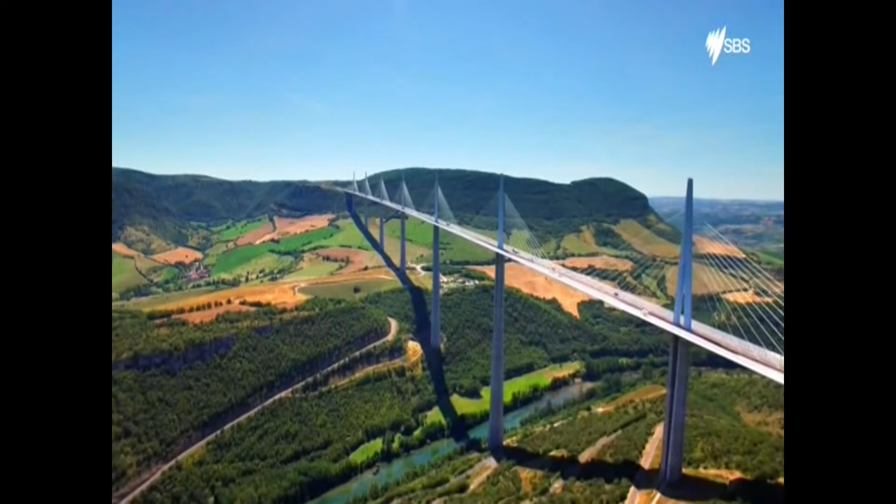Majestic, dramatic, awe-inspiring. These are the bridges that are worldwide icons, as well as engineering marvels. Each of them broke new ground. The first, the biggest, the longest, and the tallest.

I'm Rob Bell, an engineer, and I'm on a global adventure to discover how and why these magnificent structures were built, and to learn about the sweat and the sacrifice that went into their construction.

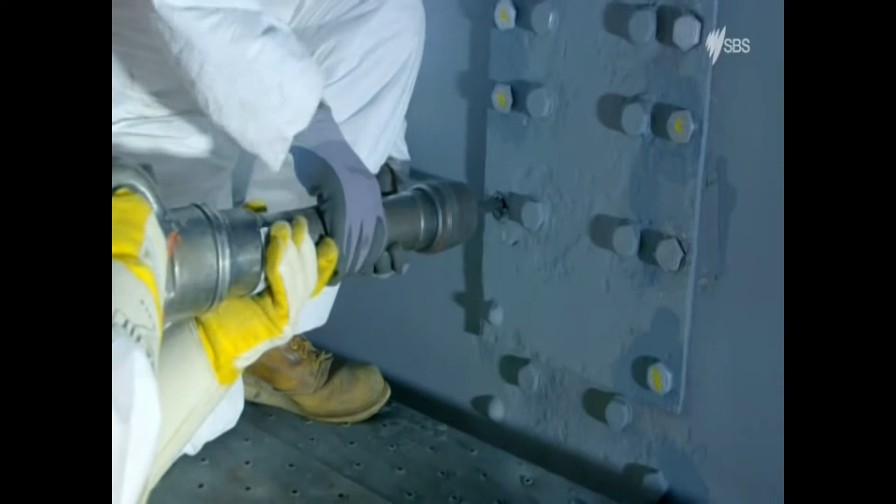I'm going to take you closer than ever before. Oh, this is magnificent. Inspect them from every conceivable angle. Oh, yeah. And meet the men and women who keep them working round the clock, no matter what. Check this out. These are the world's greatest bridges.

Sydney, Australia's oldest and largest city, and one of the world's most beautiful waterfronts. It's known as the Harbour City, and the very best way to arrive here has to be by boat, just as the first European settlers did some 230 years ago.

Sail into the harbour and you'll pass two world-renowned structures, the Sydney Opera House and the Sydney Harbour Bridge.

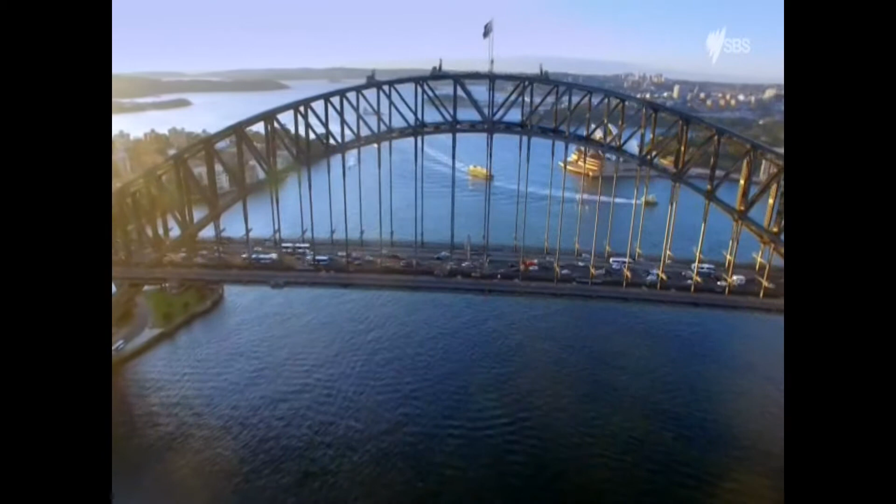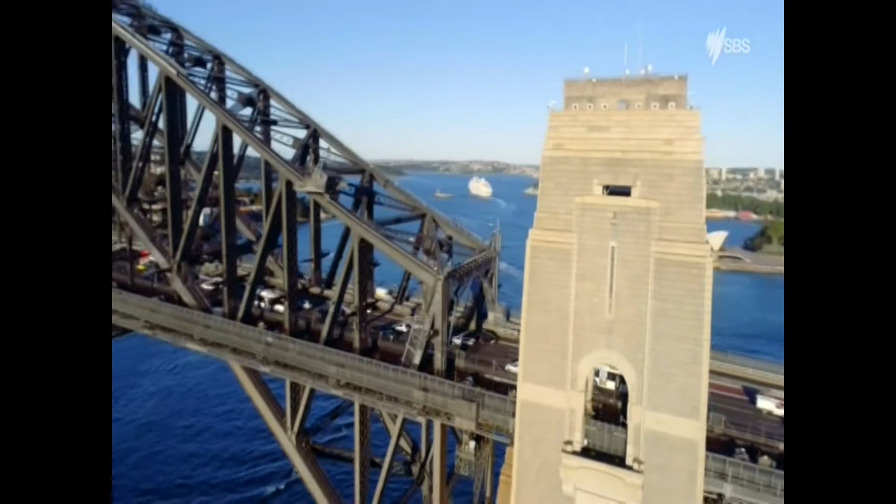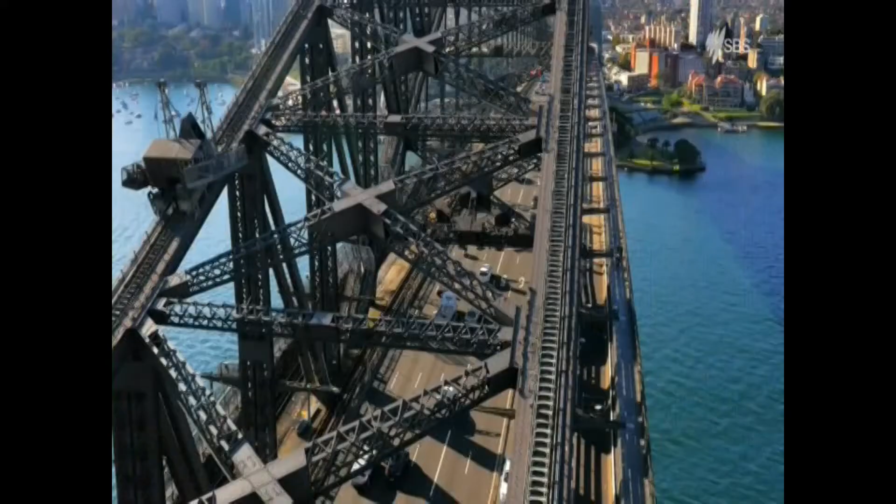Rising to a height of 440 feet, it's the world's tallest steel arch bridge, connecting the northern suburbs of Sydney with the city centre. It weighs more than 39,000 tonnes, spans 1,650 feet and is 160 feet wide. It carries 8 lanes of traffic, 2 railway lines, a footpath and a dedicated cycle path. Every day, more than 200,000 cars travel across it.

When it opened on the 19th of March 1932, it instantly became a world-renowned landmark. And since then, millions have passed across it, over it, and under it. Like a giant, triumphant gateway, it signals your arrival here into Australia.

The bridge had taken a century from first proposal to completion. The construction itself lasted 8 years and cost £6 million. And its arrival marked a new stage in this young city's remarkable evolution.

Sydney was founded in 1788 when 11 British ships landed, right about here. On board were more than 1,000 settlers, including some 850 convicts. The captain described this as, without exception, the finest harbour in the world. And he named it Port Jackson.

Within 4 years of the first shipload, another 4,000 convicts arrived. They were followed by the first free settlers from Britain, who travelled here to make a new life. By 1871, 200,000 people called it home.

As the south side of the harbour became crowded, some began settling directly opposite. The North Shore's so close, look, you could swim to it. Yet to get there by land, you'd have to travel a good 15 miles all the way round. And in the 19th century, that journey would have taken about a day.

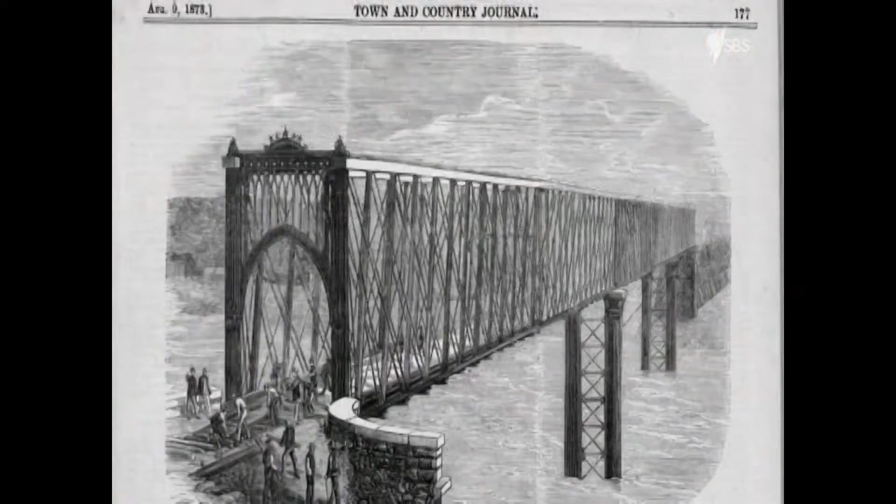The solution, everyone knew, was a bridge between the south and the North Shores. In fact, this wasn't a new idea. Throughout the 19th century, various bridge proposals had been submitted, but had all been rejected by successive governments. The designs were considered too fantastical, too unsightly, too much of a risk to shipping, or simply too expensive. But by 1900, a solution was needed urgently.

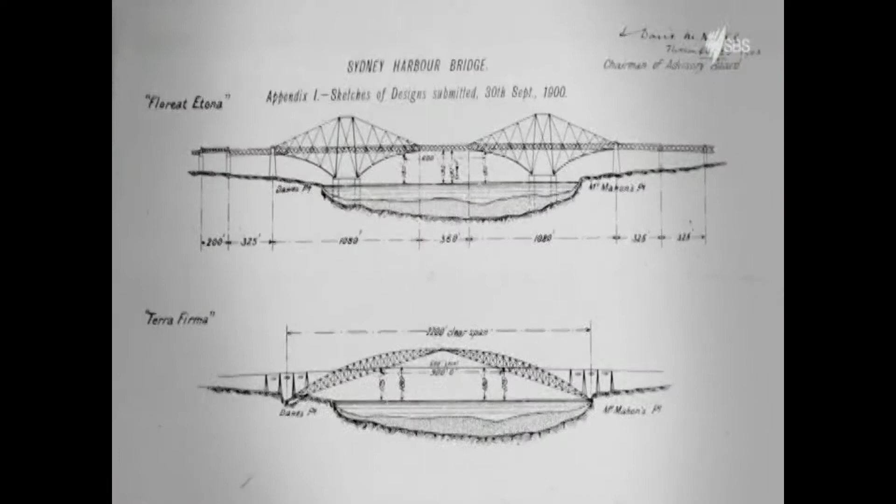So the government launched a worldwide competition to find the best design and construction plan. 30 of the top entries were put on public display here at the Queen Victoria building, once a market, but now a smart and chic mall. But the judges deemed them all to be unsatisfactory and too lacking in detail.

The only answer? A second competition, this time with a much more detailed brief. The bridge had to allow a clearance of 170 feet above the water. The main span needed to be 1,192 feet long, and the deck a minimum of 60 feet wide. It also needed to accommodate 2 railways, 2 roadways, 2 tram tracks, and 2 footpaths.

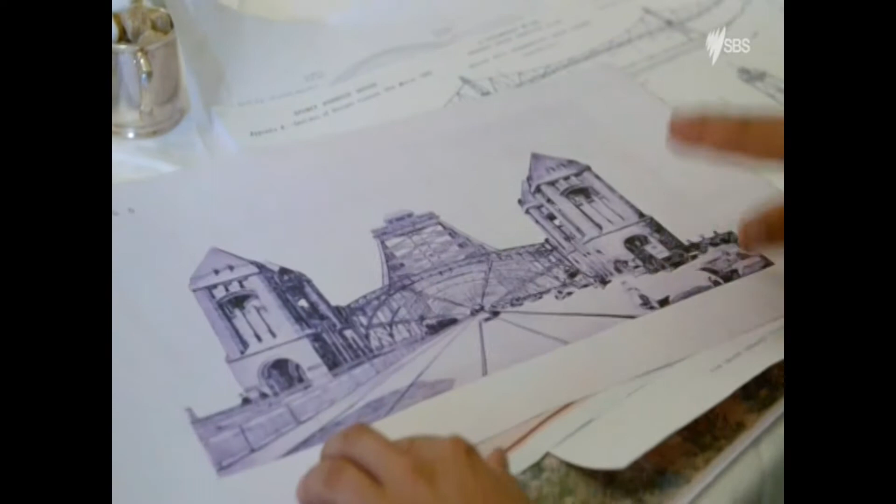It was this submission from Norman Selfe that won in the end. A cantilever bridge, a design where the beams are anchored at just one end and supported by large towers. The judges advised the government that construction should start immediately and be completed within 5.5 years.

But then a change of government brought the entire project to a grinding halt before it even got started. The designers were furious. Over a period of 3 years, they'd invested a huge amount of time and money into what they described as the Sydney Bridge guessing competition, and all for nothing. And much to the anger of the people, it was looking like Sydney Harbour would never get its bridge.

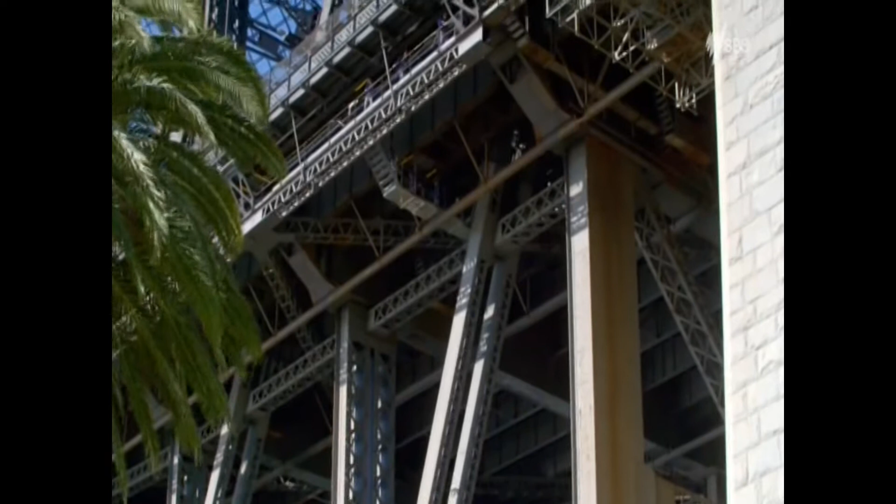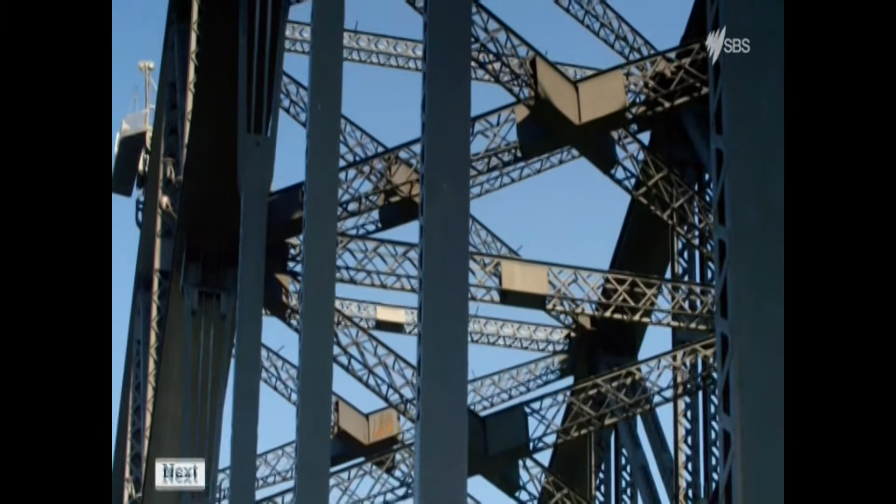The Sydney Harbour Bridge, once the highest man-made structure in Australia and still the most famous. Walking across, you get a real appreciation of the scale of what's here. But it's not just the size, it's solidly built too, and you get a real sense of that looking up - the width of the steel plates that make up the arches, all the truss work between them, not to mention the imposing granite-faced pylons at each end.

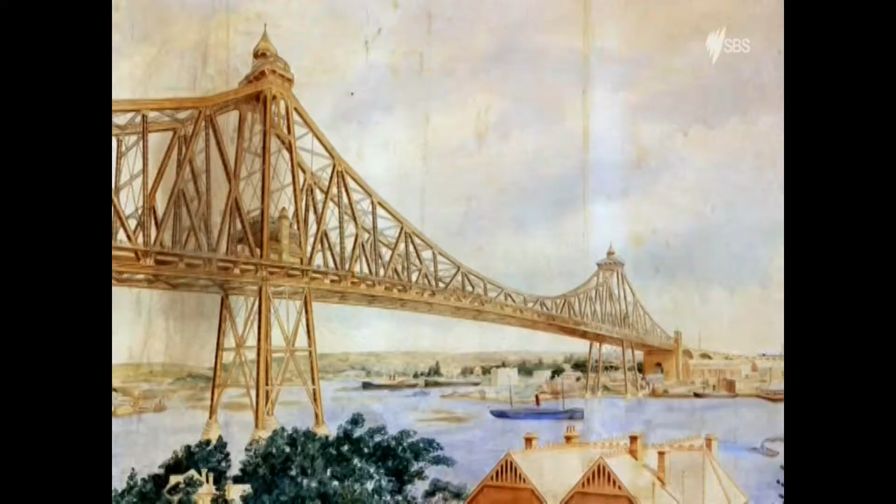It's seriously impressive. But at the beginning of the 20th century, it seemed unlikely this magnificent bridge was ever going to be built, as the project was hit by one delay after another. Norman Selfe's design, now more than 10 years old, was outdated, and following his death in 1911, the doors were left wide open for a new generation of bridge designers.

The bridge we see and admire today might not have existed if it weren't for the drive and determination of one man, John Jacob Crew Bradfield. And even if it had gone ahead without his involvement, it would certainly have looked very different.

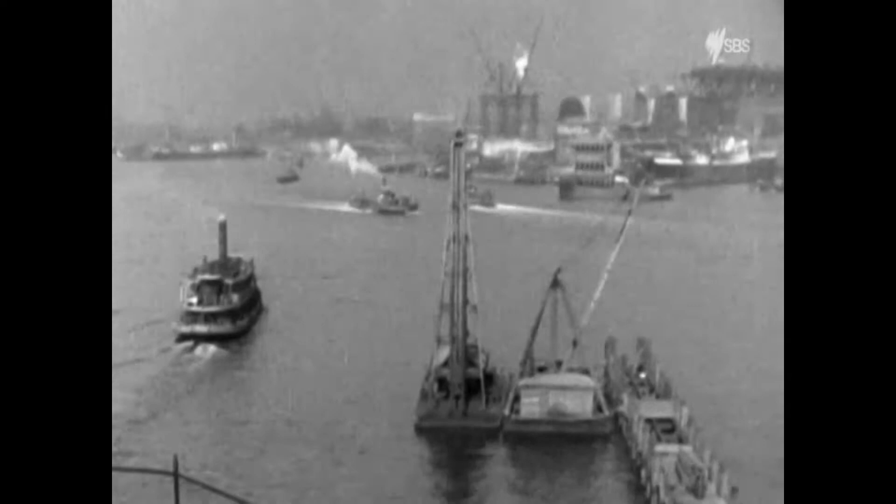Bradfield began his career as a draftsman. In 1891, he joined the New South Wales Public Works Department and went to live on Sydney's North Shore. That meant travelling to work by ferry, so he understood commuters' demands for a bridge all too well. As an advising engineer on the abortive bridge design competition, he'd witnessed what a farce it had been.

But in 1912, when the government took another look at building a bridge, he was determined to make it happen. After being appointed chief engineer of the Harbour Bridge and Metropolitan Railway construction, Bradfield submitted two designs himself. In 1913, one of these was accepted.

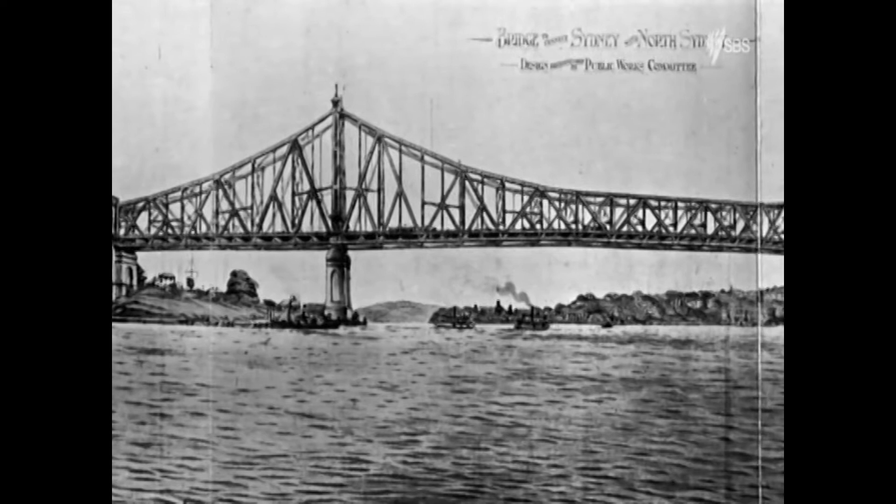It was a cantilever bridge, with each span built out sideways from huge piers. Steel trusses were to be used to give it strength and rigidity. Connecting Dawes Point on the south shore to Milson's Point on the north, it would carry four lines of railway, two roadways, and a footpath.

Although still a cantilever design, it was far more ambitious than any past submission. The budget was agreed, the design was agreed, and the time frame was agreed. But then the First World War broke out. The money for the project was diverted to the war effort, and once again, the bridge was cancelled.

It was to take a further 8 years before the state government were once again in a position to consider Bradfield's proposal. Luckily for them, Bradfield was a patient and determined man, something his grandson Peter remembers well.

I think he knew how important it was to weld the city together, to get the east and the north and the south and the west together, and the bridge was absolutely essential. He was a visionary in many senses, always extremely meticulous in everything he did. He didn't have a localised view of things, he had a national view of things.

So dedicated was Bradfield that he travelled the globe to meet the world's top bridge-building companies, learning all he could about the latest construction technologies and techniques. When he returned home, he was no longer wedded to his cantilever design. Instead, he asked the government to accept submissions for an arched bridge.

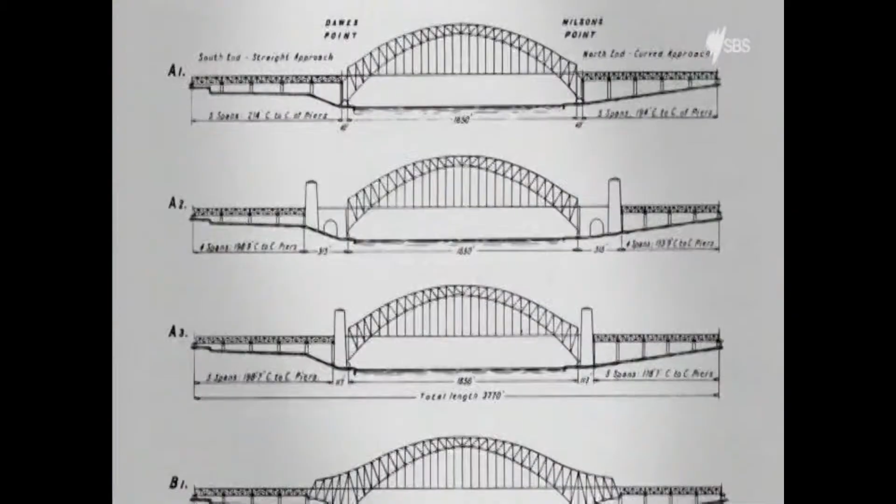Before construction tenders for this new arch design were even accepted, Bradfield began preparing the ground. On the 28th of July, 1923, the turning of the first sod ceremony took place on the North Shore. What should have been a cause for celebration was, for many, a time of great concern, as 500 houses in the immediate area were compulsory purchased and destroyed.

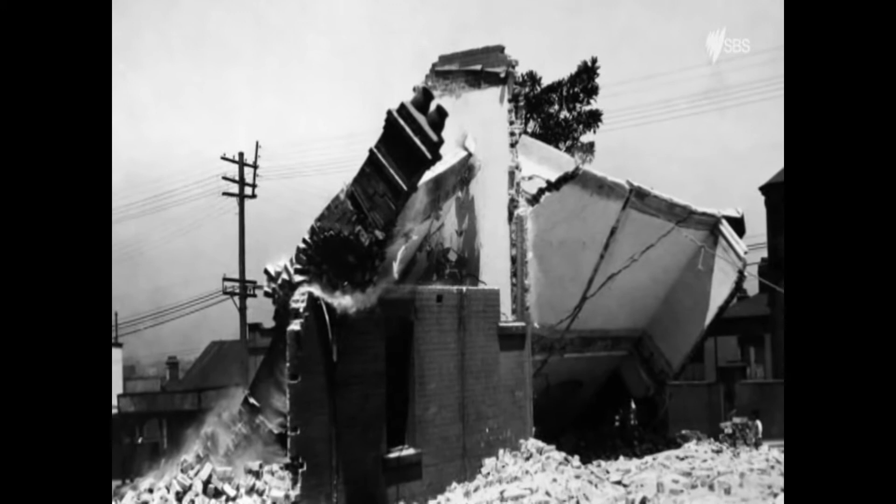Some people wrote letters to the government. This one's from a Mr. Lockhart, an 82-year-old who stood to lose his furniture business. He writes, 'Dear Sir, my wife wrote some weeks ago regarding compensation for loss of home and means of living. In reply, you stated that all the department could grant would be the cost of cartage. The amount is small, but would be very acceptable, as we have no means and are both too old to go out to work.' Another letter, this one from a Mrs. Pitcairn, a widow whose daughter taught music at home. She writes, 'My one desire is sufficient to get a home again. Indeed, since we lost our home, we've had to sell many things for necessities to keep out of debt.' She goes on, 'Through the bridge, everything is taken from us. At this time, I had only one wish, to take my own life, and only my religion held me back.'

Though some people in the government may have been sympathetic to these pleas, they were afraid of setting an expensive precedent. A blanket policy was laid out. There'd be no compensation.

Over on the South Shore, in an area called the Rocks, the residents had even less sway. It was this area where the poorer, less fortunate members of society made their homes, packed with tiny bars, brothels and hovels. The government wasted no time driving these residents from their homes before auctioning them off to building supply merchants who demolished them.

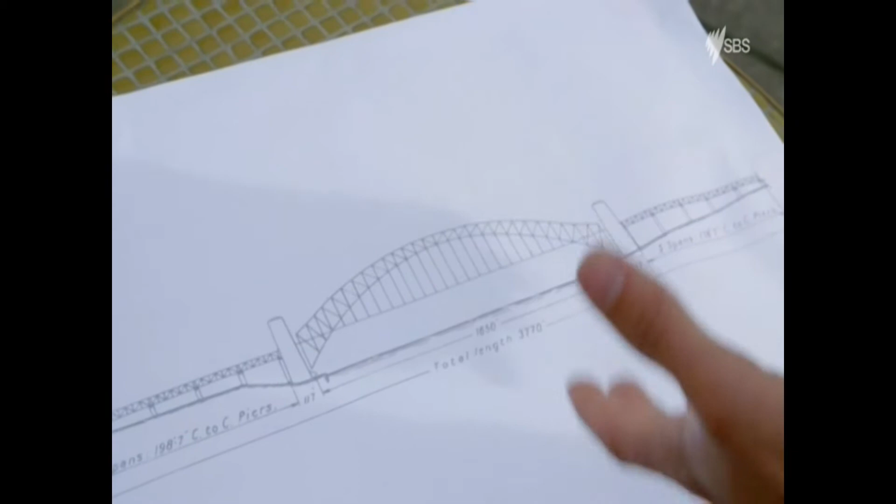Bridge A3, as it was known, would be the largest structure Australia had ever seen. It would be strong and it would look strong, and its granite-faced pylons here would, according to Bradfield anyway, give it an air of dignity.

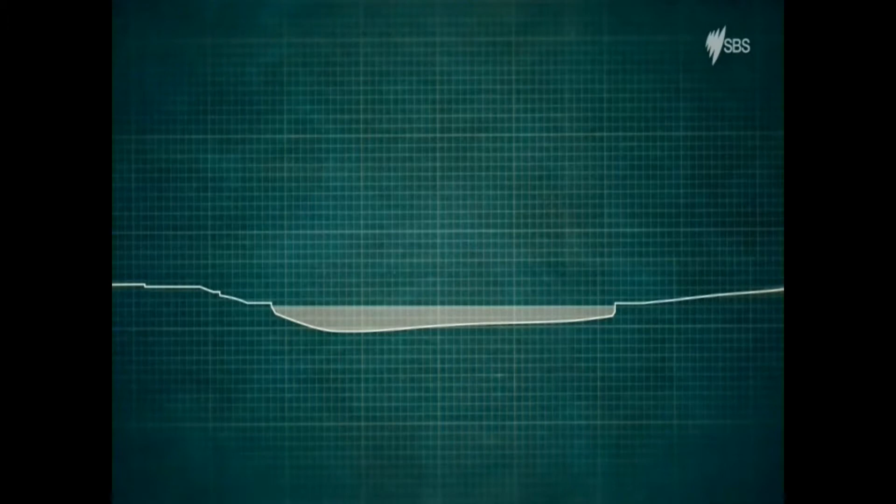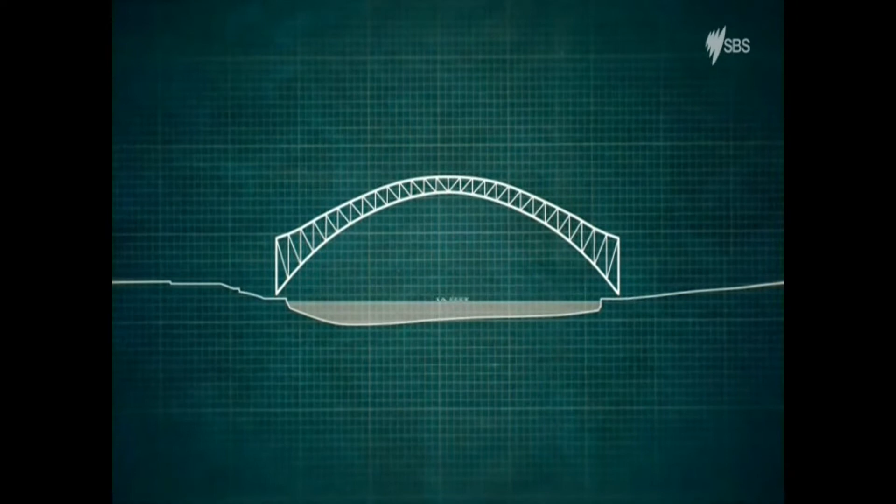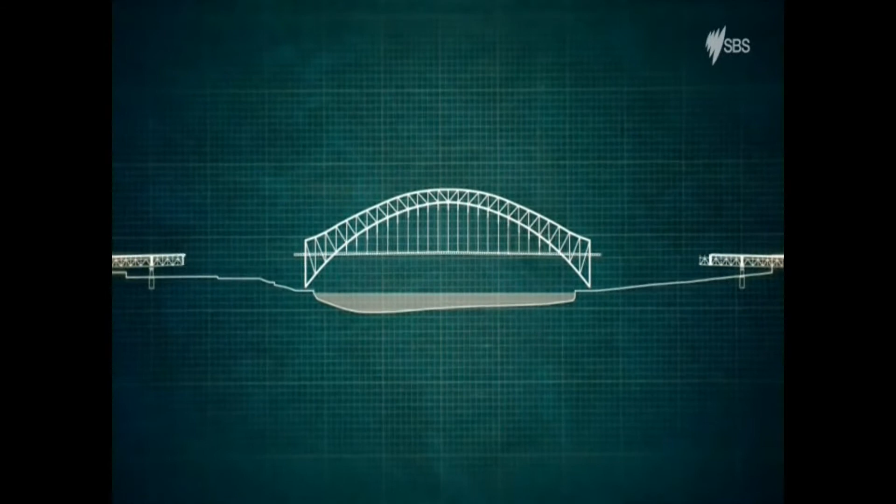The design provided for a single great central arch spanning 1,650 feet, crossing Sydney Harbour from north to south in a single stride, and rising at its centre to a height of 440 feet. From this, the trackway was suspended at an average height of 170 feet above sea level, passing off the arch at either end onto a series of 5 approach spans, formed of horizontal girder structures on granite piers.

At 50,000 tons, this would be the world's heaviest structure. The steel sections, and even the rivets holding them together, would be the largest ever produced for a bridge project.

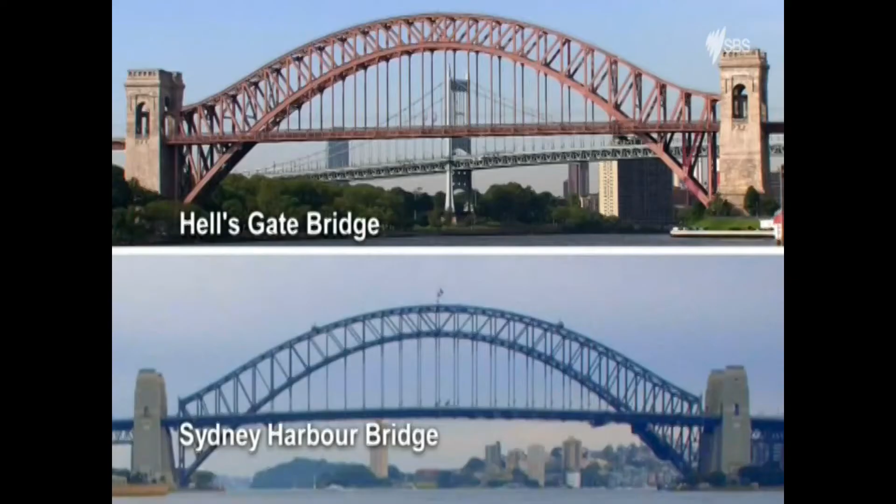20 years earlier, he'd considered an arched bridge to be a bit of an eyesore. But now he was a total convert and had completely ditched his original proposal of the cantilevered bridge. Bradfield had been won over to the steel-arched bridge design after seeing New York's Hell's Gate Bridge. Built in 1916, it was the first steel arch to span 1,000 feet. Although only a fraction the size of the Sydney Harbour Bridge, they bear an uncanny resemblance, even down to the decorative stone pylons.

Bradfield estimated that the steel arch would cost £350,000 less than the cantilever bridge. And with new advances in steel, making it both lighter and stronger, the arch to Bradfield was becoming not just practical, but irresistible.

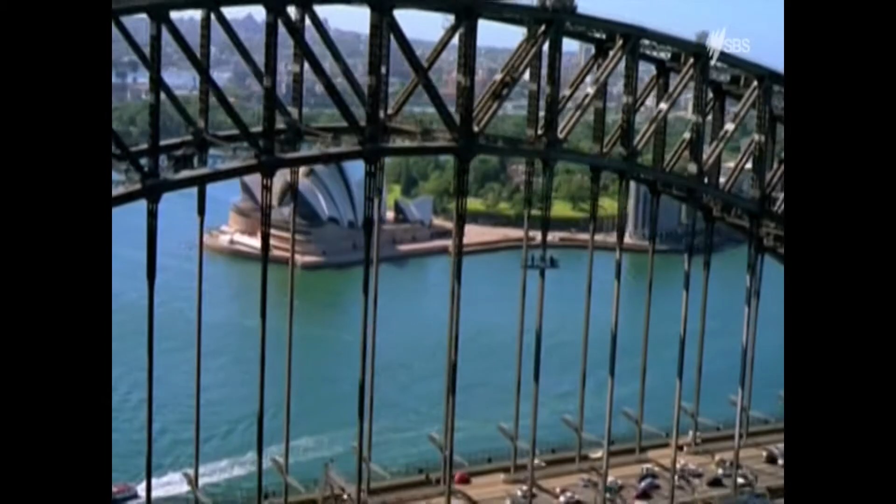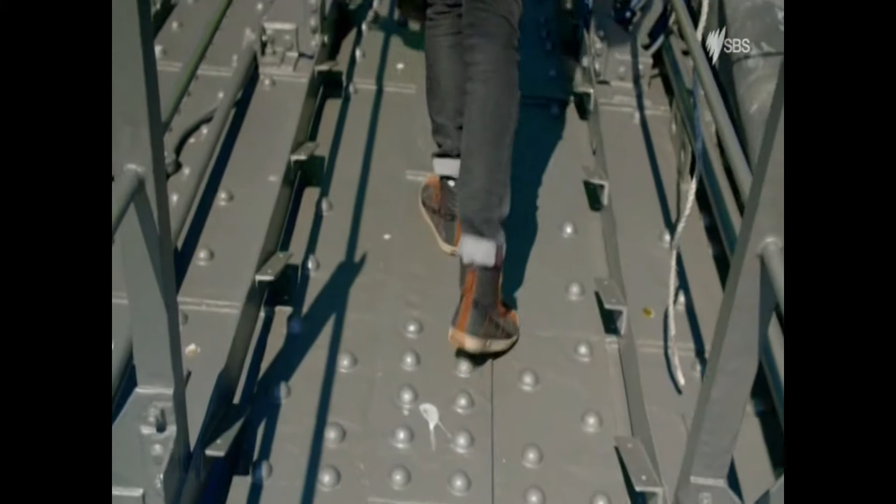Bradfield had approved the design by Dorman Long, and now the responsibility for getting it built largely fell to their English Director of Construction, Lawrence Ennis. During a 43-year career, he'd built bridges all over the world. For this latest project, he moved to Australia, describing it as the most difficult he'd ever encountered.

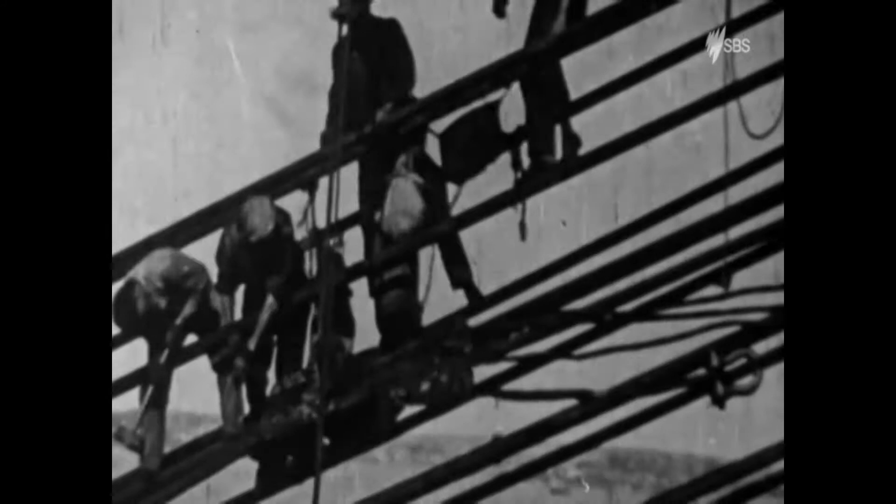His task was Herculean. It would take 5 years before construction of the giant steel arch even got underway. Before that, there were plans to be drawn up, workshops and machinery to be built, and granite to be quarried. And eventually, once the work began, there would be those that would give their lives for the bridge.

The Sydney Harbour Bridge. After years of argument and delay, its construction finally started in 1923, but it would still be another 5 years before the famous steel arch would begin to appear. Granite was needed to encase the reinforced concrete twin-towered pylons standing either side of the arch. 290 feet high, they don't actually serve any structural purpose, but Bradfield insisted on them because they made the bridge look reassuringly sturdy.

The first step was finding a nearby granite quarry accessible from Sydney, and what better way to look at what they found than from the air? The granite itself came from just down there, at a place called Moruya, about 170 miles south of Sydney by sea. It's been quarried here since 1850, and it was described as the best granite outside of Aberdeen.

An incredible 9,000 square kilometres of Australia's southeastern coast is made up of granite. So why did they choose Moruya above all the other sites? Well, the answer was quantity, quality, and ease of access to the Moruya River.

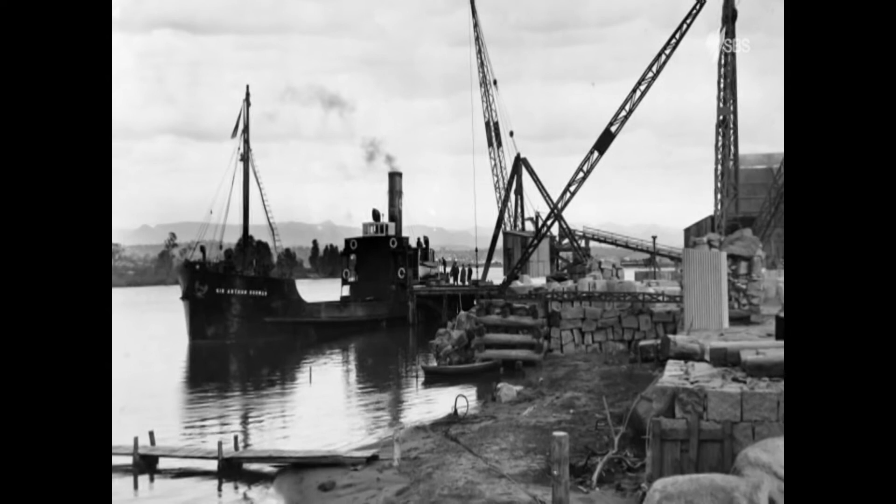3 steamships were built specially to transport the rock down the river and then across the sea to Sydney. But first, it had to be mined. At the time, Moruya was a tiny community, and they didn't have the necessary skilled manpower, so Dorman Long went on a recruitment drive.

John Gilmore was one of the workers they signed up. In 1924, he, along with his wife Mary and their 9 children, moved from Scotland out to Moruya. The work was hard and the hours long, but soon a bustling community was established next to the quarry, in an area that became known as Granite Town.

In its height then, roughly how many people would have been living here in Granite Town? Over 300. At the height of the works too, there were 64 children at the school.

So paint a picture for me then. What would we have seen here in Granite Town if we would have been here back then? There were 72 cottages made of timber. There were bachelors' quarters for the single men. There was a post office, a cooperative store, a school and a hall.

So this became its own community then, did it? Yes. They would enjoy social activities in the hall, so practically every Saturday night it was the place to be. They'd have concerts. The Italians had a band, and the Scottish enjoyed the dancing.

And then the quarry itself was quite nearby, was it? Yes, just over there, just over that hill. Very close by. When they would blast the rock away from the quarry face, there are memoirs of people recording things falling off shelves. Really? Yes, because of the vibrations.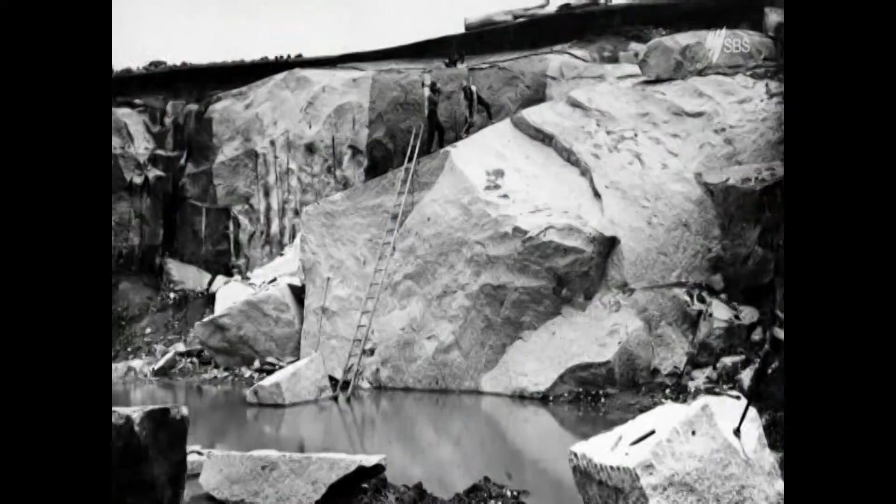Yes. It's this very same quarry which provided the Sydney Harbour Bridge with around 50,000 tonnes of numbered stones, each one dug, shaped and then shipped to their destination 200 miles north.

And whilst I'm here, I can't resist trying my hand at a bit of stonemasonry. What were the techniques those quarrymen were using to get the granite so beautifully and so pristine for the Sydney Harbour Bridge? Once they'd produced that large block from the quarry face, then they moved it out as far as they could and then started cutting it up into smaller blocks using feathers and wedges.

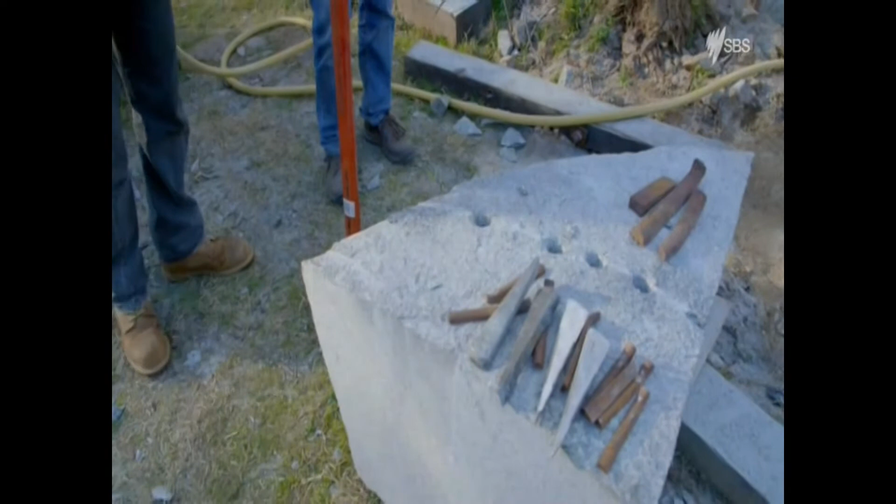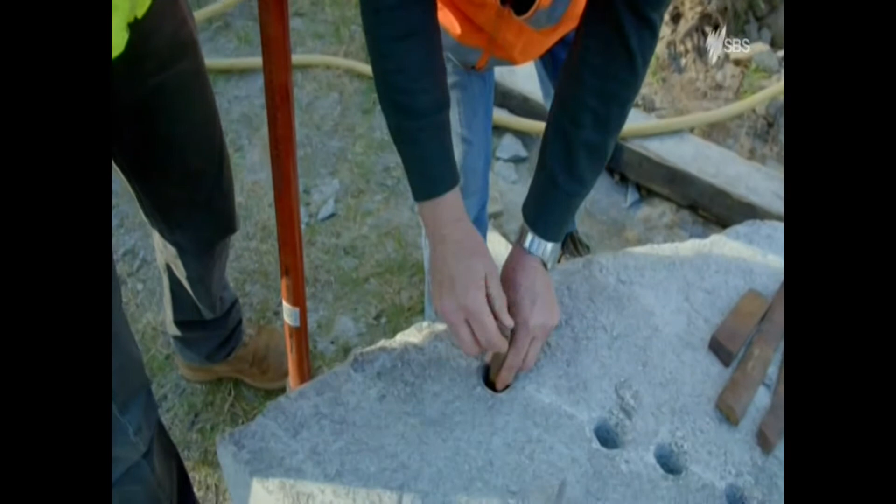We've got a bit of a demonstration set up for you on a smaller section of stone. Holes would have been drilled in the line where you wanted to cause the split, and the feathers and wedges, or feathers and plugs, go into the hole, with a wedge fitting between them. The feathers sit down into the rock, down in the hole you've drilled, and then as you drive the wedge through, you can see what happens there.

The feathers get separated, and ideally that's separating the rock on each side. The feathers and wedge are designed so that there's equal pressure on both sides. So we've got our feathers and wedges all nicely lined up here along the line we want to split the rock. Is it brute force now?

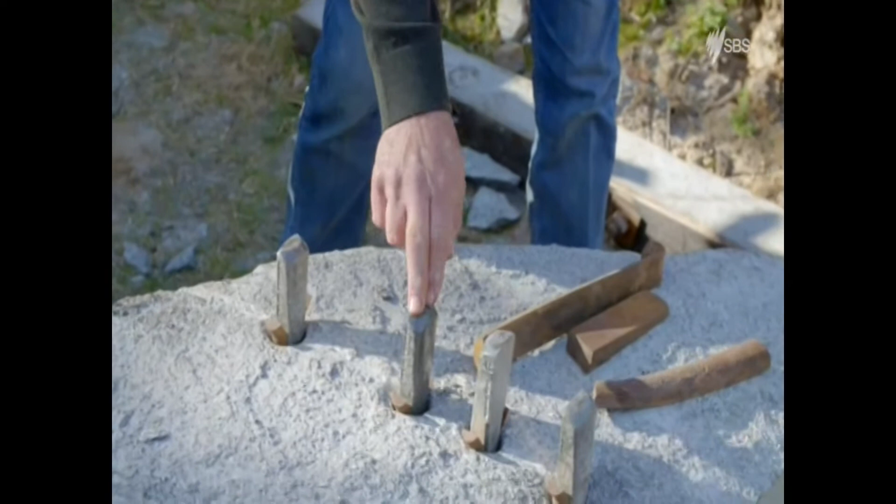Yeah, it's brute force now. Just remember a few taps on each one, about the same strength, go along to each one and then come back again, and keep doing that process until it splits. I'm actually quite excited to get involved and see if I can split this enormous chunk of granite with just what is a relatively small tool in my hands here, but done the right way. Fingers crossed. Right, let's give it a shot.

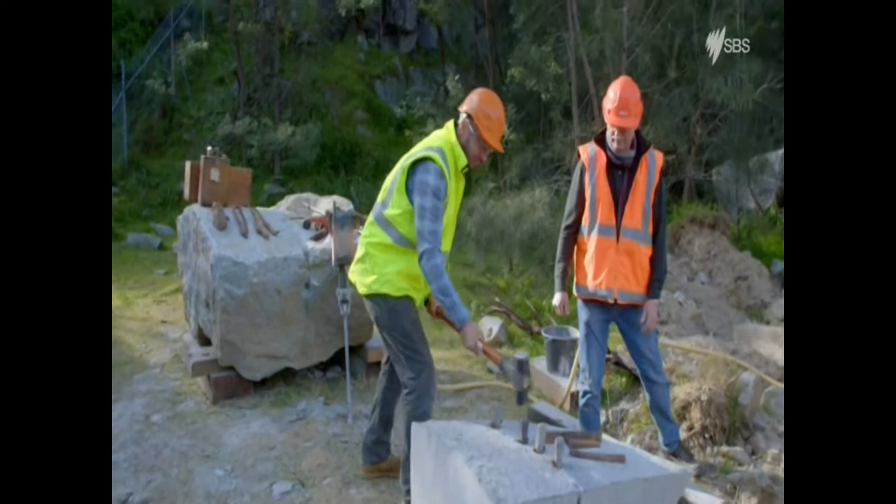That's not too hard? No, OK, good. So, yeah, this feels like it is quite a nice, delicate process, actually. So now I come back through? Yes. Well, hey! Is that gone all the way through? Yes, it's definitely started. Let's have a look. Whoa, look at that.

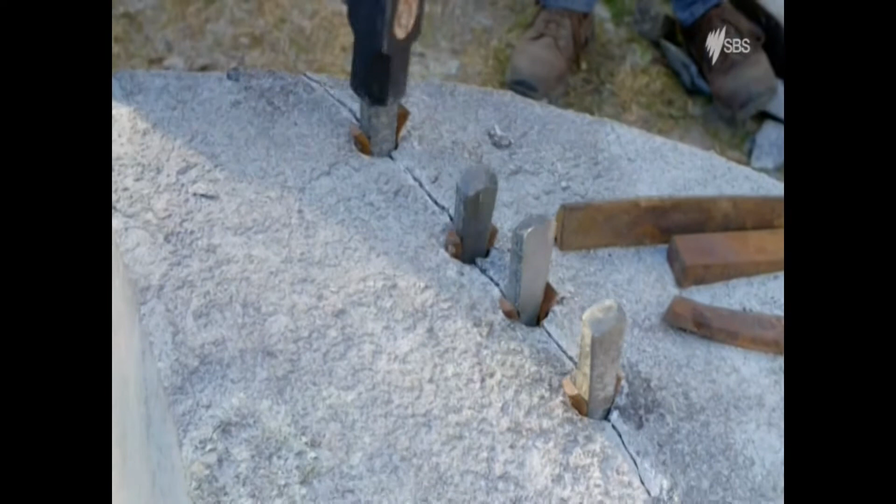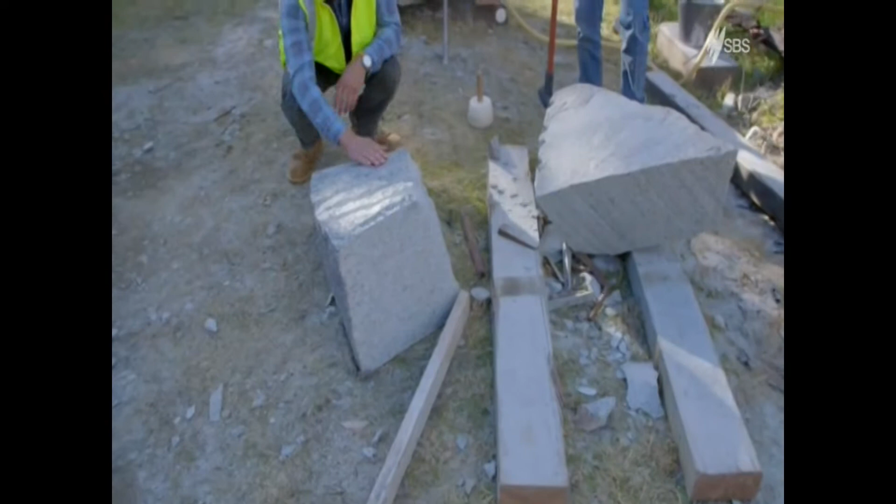Look at that, and look at this beautiful, clean granite. That's the finish that I imagine Bradfield looked at and said, yeah, that's the finish that I want to see on that pylon. It wouldn't have needed much more work than that on a nice, clean split. Yeah, if you can get it exactly right to all the brickwork. I mean, that is stunning, though. I'm so pleased with that.

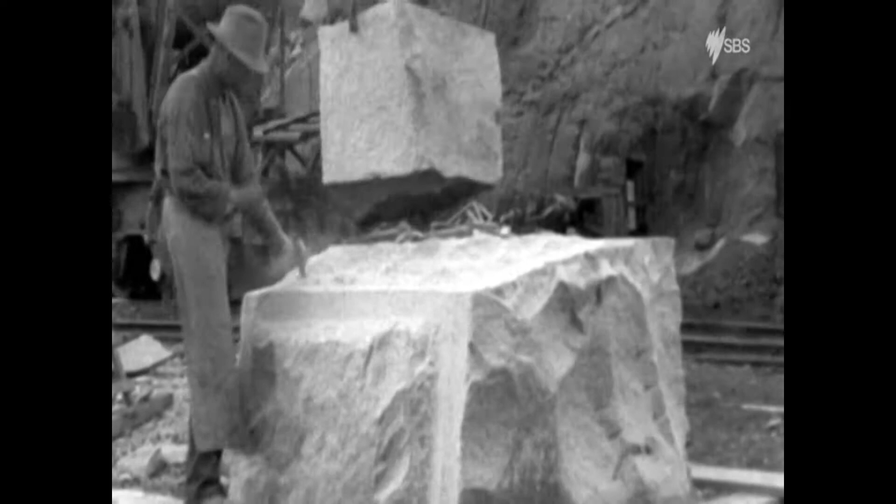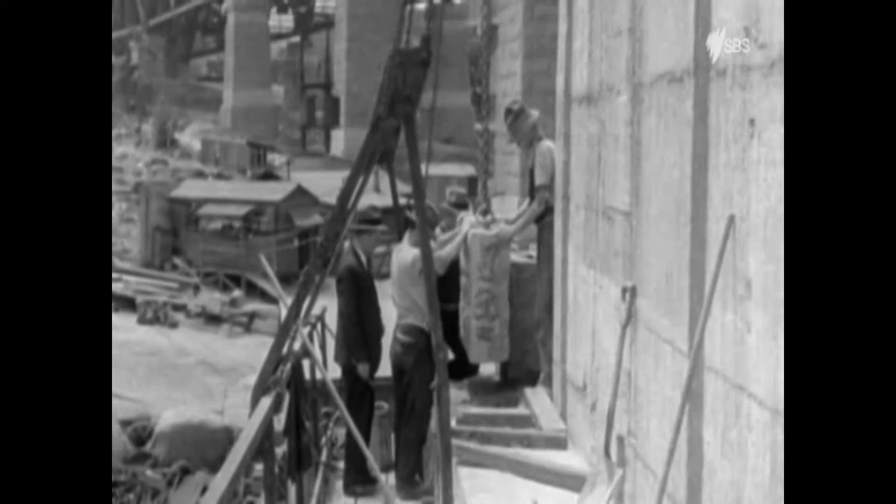Over 7 years, a total of 173,000 blocks of stone were produced this way, each hewn, cut, dressed, and arranged into position like a giant jigsaw puzzle before shipment. The quarry also provided the bridge builders with a further 18,000 metres of finished stone and 200,000 yards of crushed stone for use in the concrete foundations.

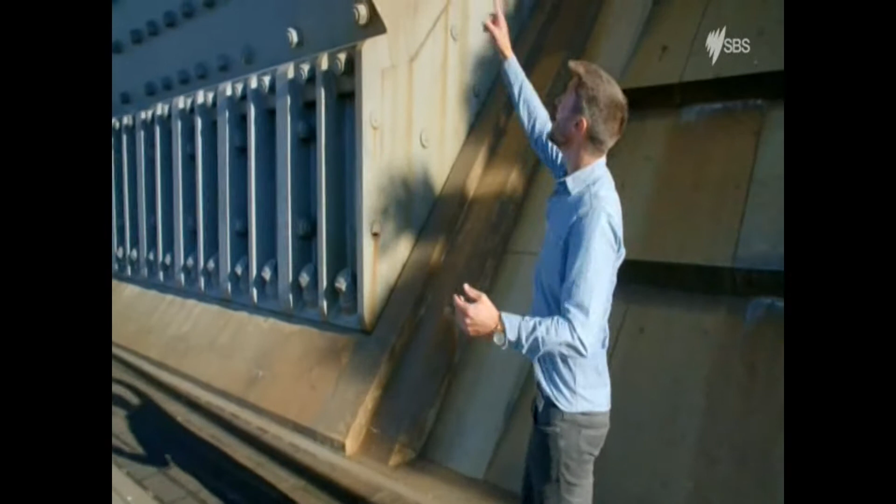Foundations on which the bridge could finally take shape. The bridge starts and finishes, rises and falls here from this super-sized hinge. There are 4 of these in total, 2 on this side and another 2 on the other side. You need the flexibility of these hinges. You couldn't have it locked down into the concrete foundation, not just because of the phenomenal winds that blow through here, but also because of the way the steel expands and contracts in the Australian sun.

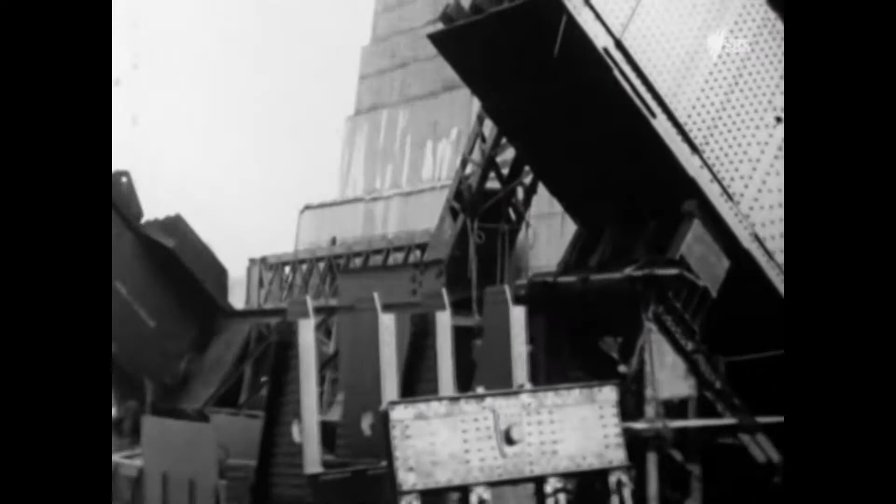On a really hot day here, the arch can rise an incredible 18 centimetres. Without these hinges, there'd be too much stress on the steel, causing it to bend and buckle and eventually fail. As well as expansion, a steel bridge of this size exerts a weight of around 20,000 tonnes on each hinge, so the hinges had to be built on top of huge angled foundations.

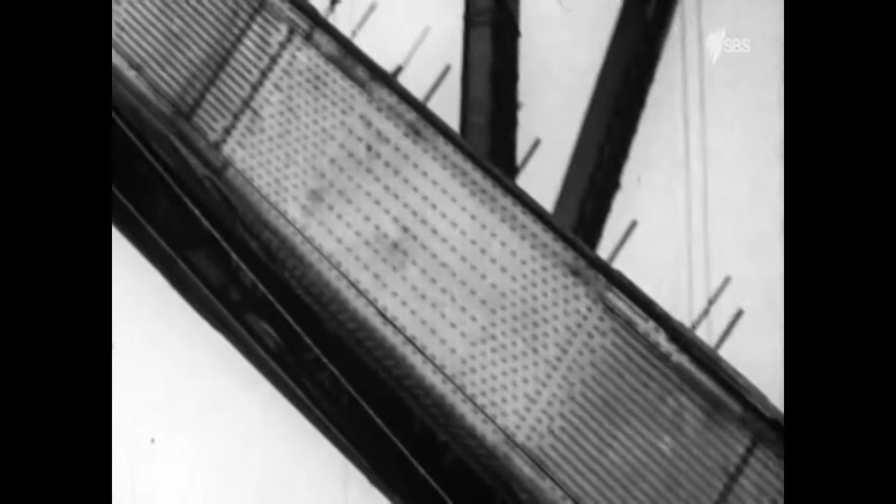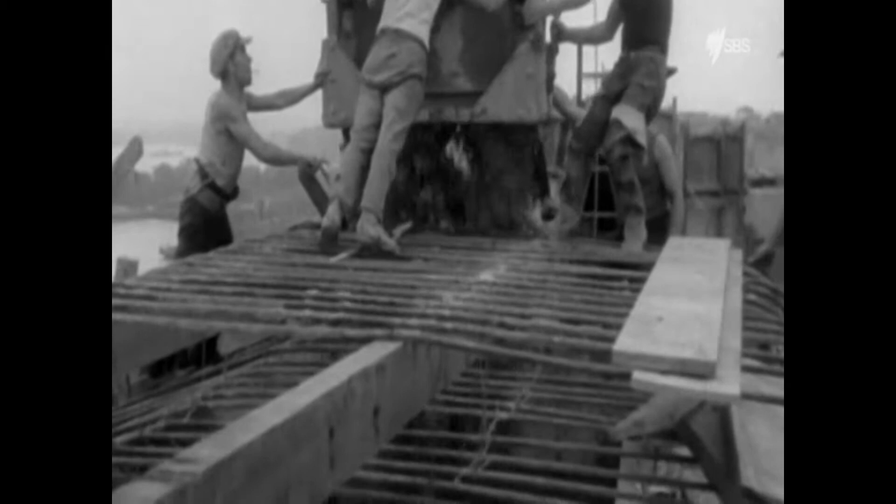Work on these foundations began in 1926. 4 large holes, 39 feet deep, were dug and then filled with a special concrete mix. In order to bear the enormous load of the bridge without cracking, the concrete had to be laid in one continuous 14-hour pour. Once the foundations and hinges were in place, work could begin on the towers, or pylons, each encased in the granite from Moruya. Only then could they finally begin construction of the arch across the harbour.

And not before time. By 1928, this stretch of water was dangerously crowded. A few months earlier, a ferry full of schoolchildren collided with a steamship. It sank immediately and 40 people drowned. For the people of Sydney, the bridge couldn't come soon enough.

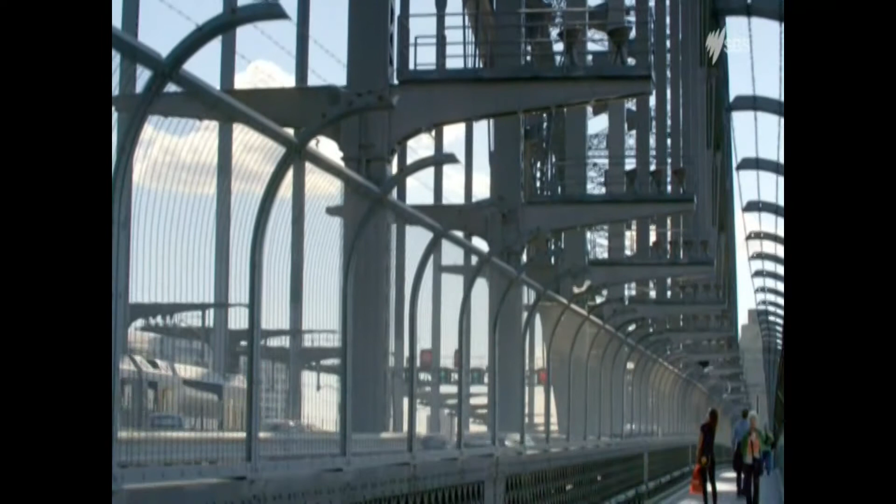But there were still big challenges ahead, not least how to support the arch as it was built across the deep waters of the harbour. The task fell to Dorman Long's consultant designer, Ralph Freeman, a long-standing expert in this field.

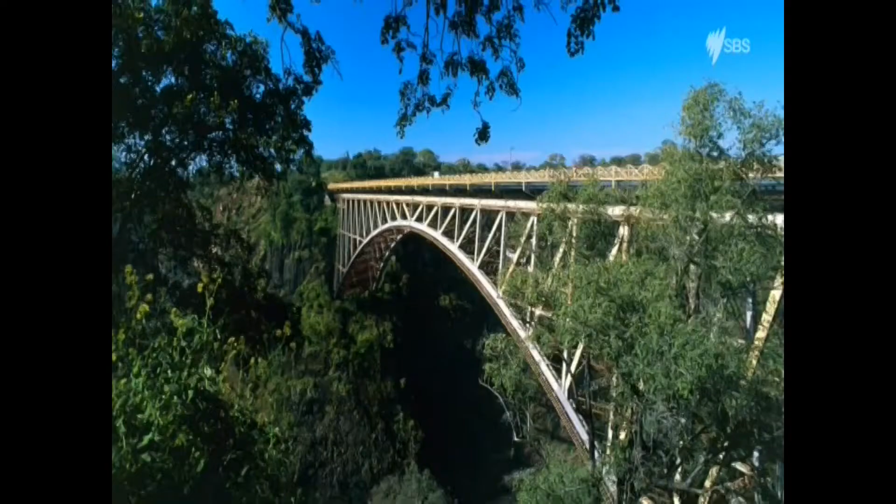Until the 2 ends of the arch being built from the north and south shores had extended enough to meet in the middle, Freeman needed a way to support the weight of all that steel sticking out from the land. The answer came from the famous Zambezi River arched bridge beneath Victoria Falls, which Freeman helped build in 1905. To build the arch across the deep ravine, Freeman devised a system using thick steel cables anchored in place to hold the arch up on both sides whilst it was constructed, a method he now intended to use with the Sydney Harbour Bridge.

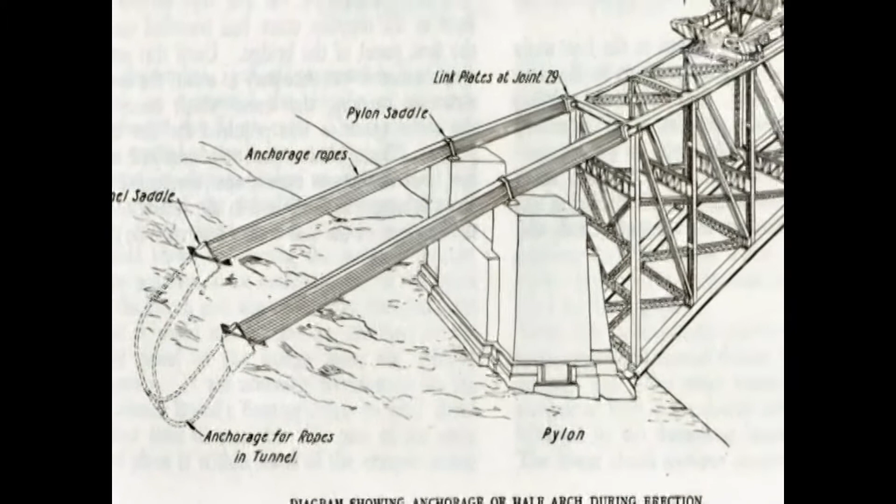The cables ran down through these iron pipes, fixed into this concrete saddle, before heading down into a tunnel 40 metres deep and being pinned into the ground. Just as the foundations and hinges are critical today for the bridge to stand up, this saddle, the tunnel, and all 1,600 miles of steel cable were essential during its construction.

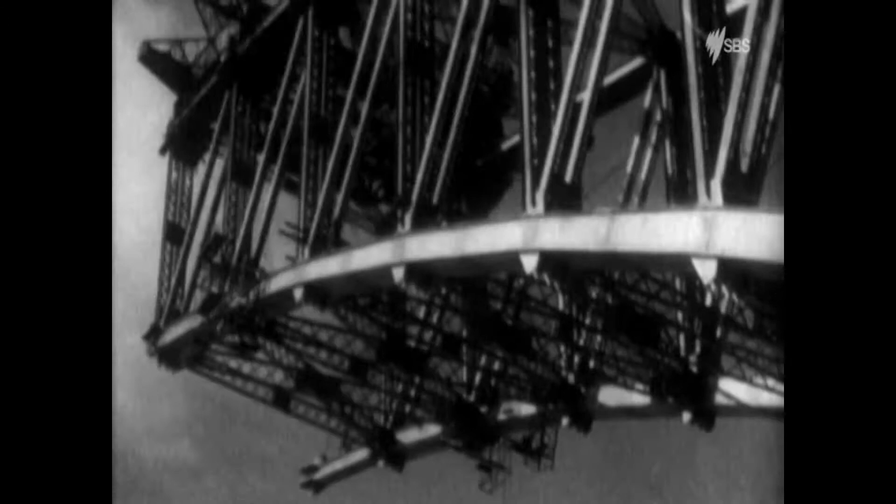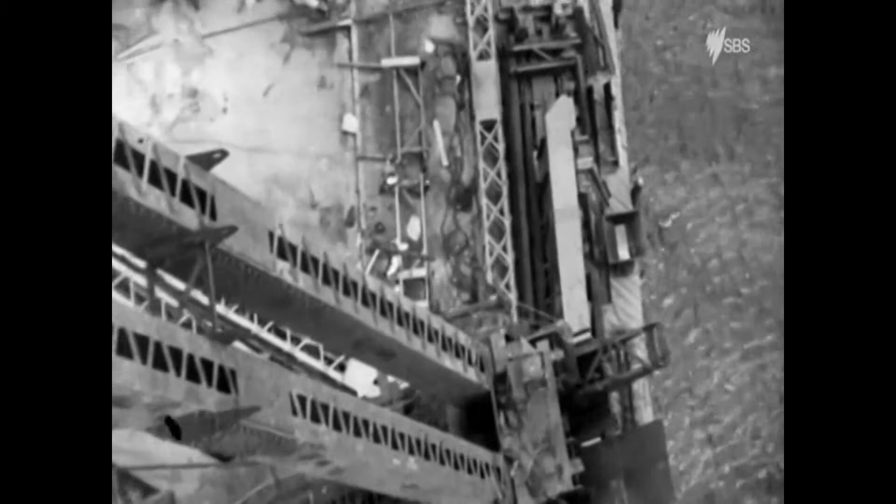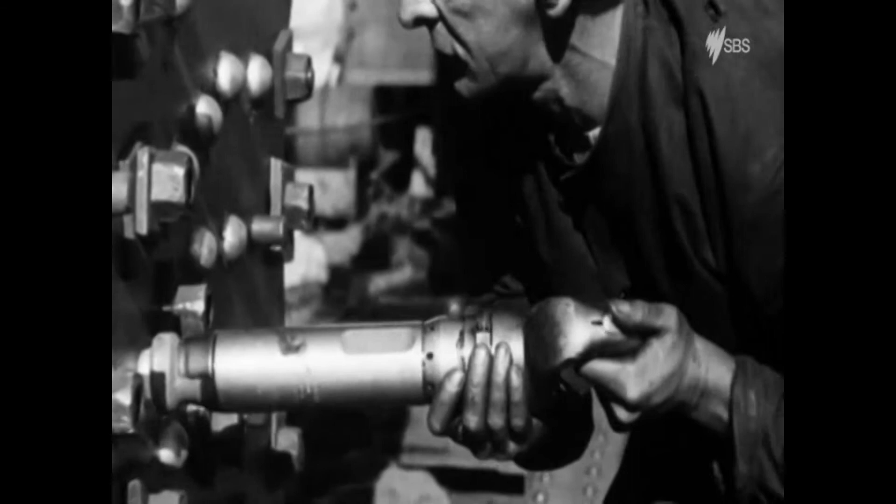Although the 2 sides of the arch were worked on simultaneously, the southern end was built slightly ahead of the northern end to detect any errors and help with alignment. The steel girders were hauled from barges by 2 specially built creeper cranes, each weighing 575 tons. As they put a new panel into place, they crept out onto it to put the next section in. Assembling the bridge was a mammoth task, involving some 1,400 riveters, boilermakers, steel constructors and riggers every year.

The work was hard, and it was hot. It was also dangerous. There were no handrails or steps like there are today. Instead, men would climb up on the rivets, or using one of these so-called podgers, a kind of pointy-end spanner they'd jam into the rivet holes and use as hand and footholds, a bit like mountaineers.

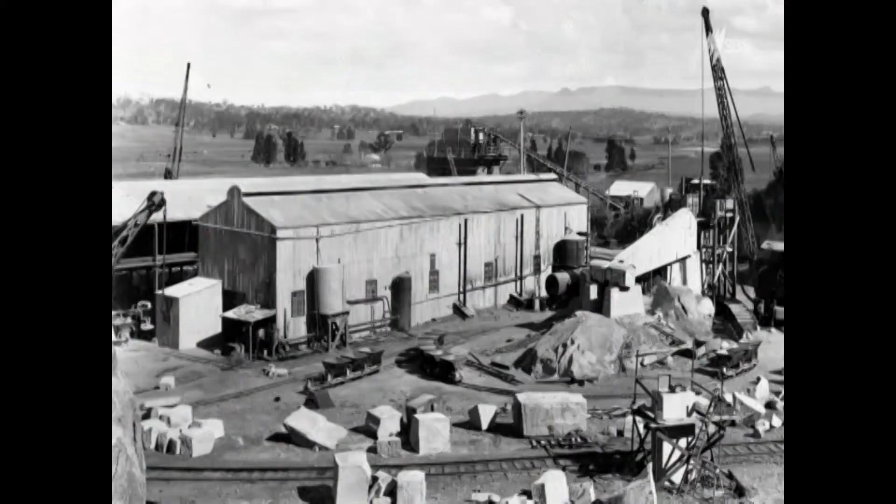But even before the arches had left the ground, 7 men had lost their lives. The first 2 recorded deaths were at the Moruya granite quarry. The earliest was in April 1926, when a man was sitting on the body of a crane when it swung round and severed his leg. The second came less than a year later, when a large block of granite toppled from a ledge, crushing one of the workmen below against the quarry wall, killing him.

In all, 16 men gave their lives building this bridge. Nearly all of them were killed as a result of construction accidents. Only 2 died falling from this steel arch.

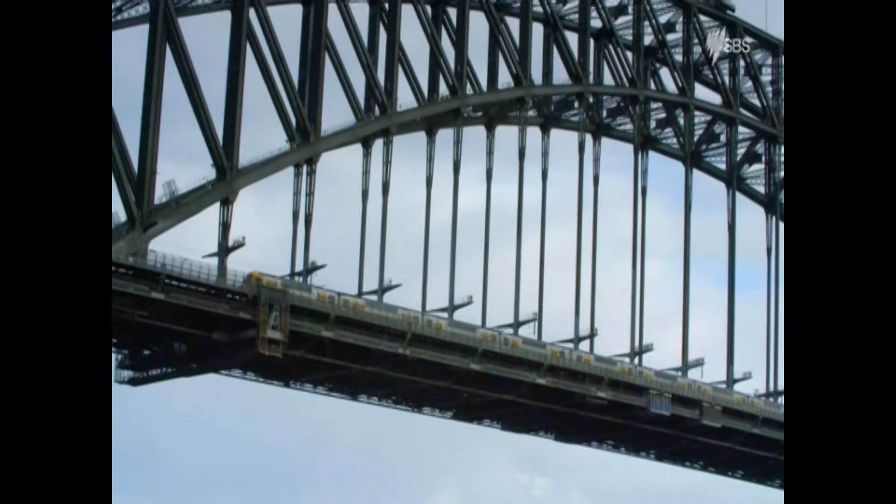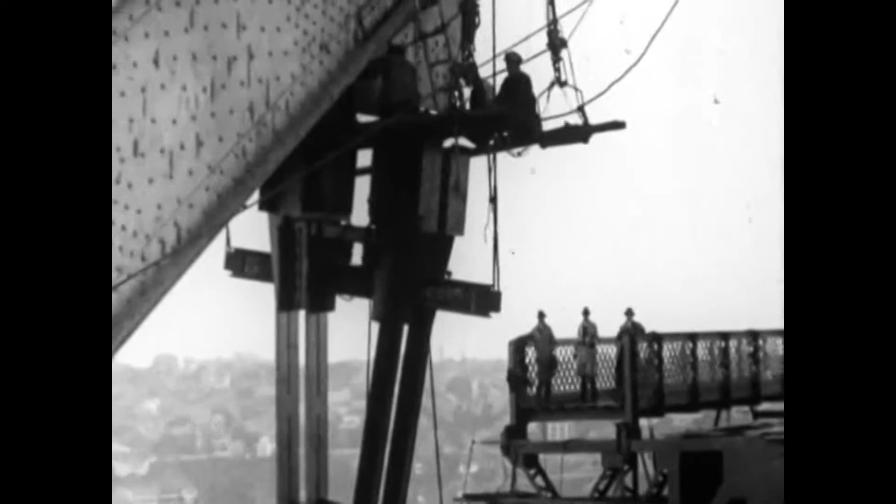But amongst the deaths, there were also some incredibly lucky escapes. The most celebrated involved a riveter named Vince Kelly. Vince was working on the road deck level, about 150 feet above the water, fixing rivets with his powerful pneumatic gun, when he slipped and fell off the platform.

As an experienced diver, he instinctively knew his best chances of cheating death were by straightening his body, pointing his toes and raising his arms above his head. By turning himself into a kind of human spear, he'd reduce the impact as he hit the water at more than 80 miles an hour.

But still, his chances of survival were less than 1 in 10. Remarkably, Vince's technique worked, and he did survive, breaking 6 ribs, but otherwise none the worse when plucked from the river. For his extraordinary feat of survival, he was awarded a special commemorative gold medal.

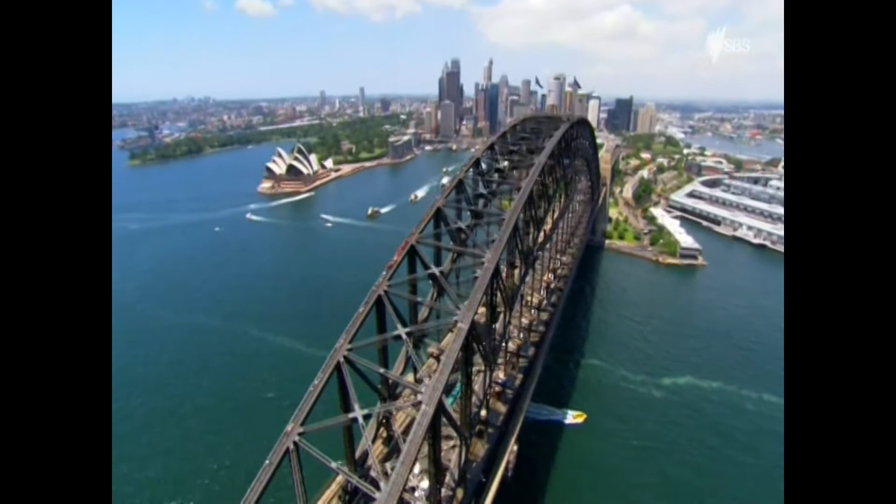Despite the risks, the bridge would become a lifesaver for many others. Before the 1929 Wall Street crash, which sent the world's economy spiralling into depression, unemployment here in Australia was already 10%. Afterwards, it more than doubled. But this construction project continued to provide job opportunities to men who otherwise may have become destitute. It kept on breathing life into the city. So much so, it was given the nickname, the Iron Lung.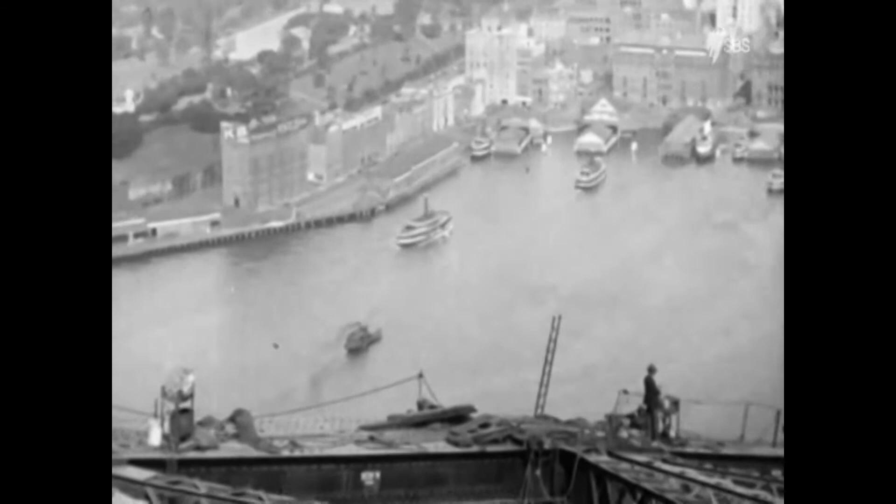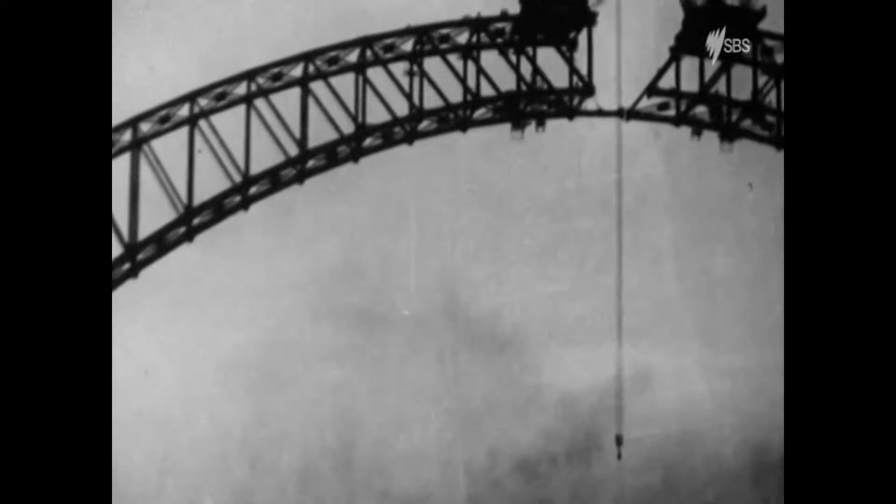As the economy worsened, working hours were cut so more men could be employed. In such desperate times, seeing the arch gradually stretch across the harbour, the 2 sides getting closer and closer, gave Australians something to be proud of.

Finally, on the 19th of August 1930, the 2 halves of the arch touched for the first time, right here in the middle of the bridge. It'd only taken 2 years since the start of construction, but at long last, Sydney North and Sydney South were united.

Up high on the bridge, Bradfield and Freeman joined Lawrence Ennis, the man who'd overseen the day-to-day management of the construction. It was Ennis who made the first crossing from south to north, along the lower chord of the arch, 400 feet above the water.

It would be another 2 years before the deck was fitted and the bridge declared open to the public. But in private, a feud was simmering between 2 of its key players, Bradfield and Freeman, which would soon explode into bitter and open warfare.

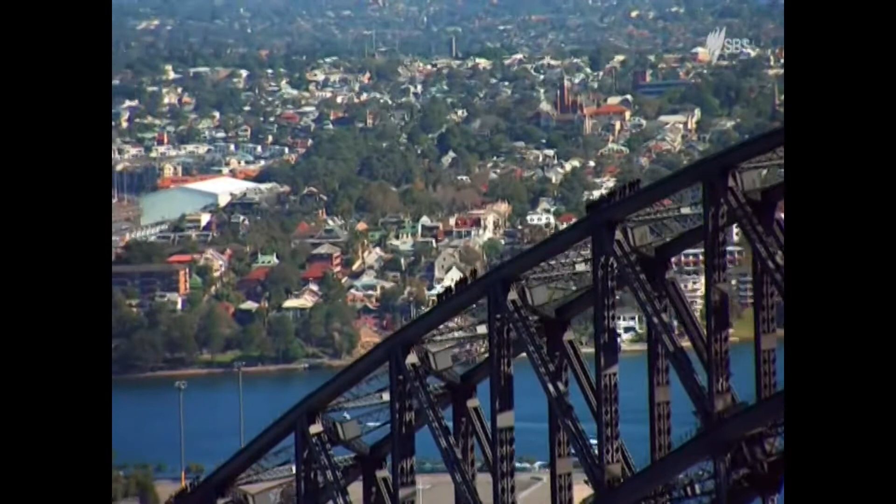Before the world-famous Harbour Bridge, there were 2 Sydneys. After it, there was only one, united by a monumental arch that rose above the water and the rooftops. When completed in 1932, it brought together 300,000 residents on the North Shore with another 600,000 on the south.

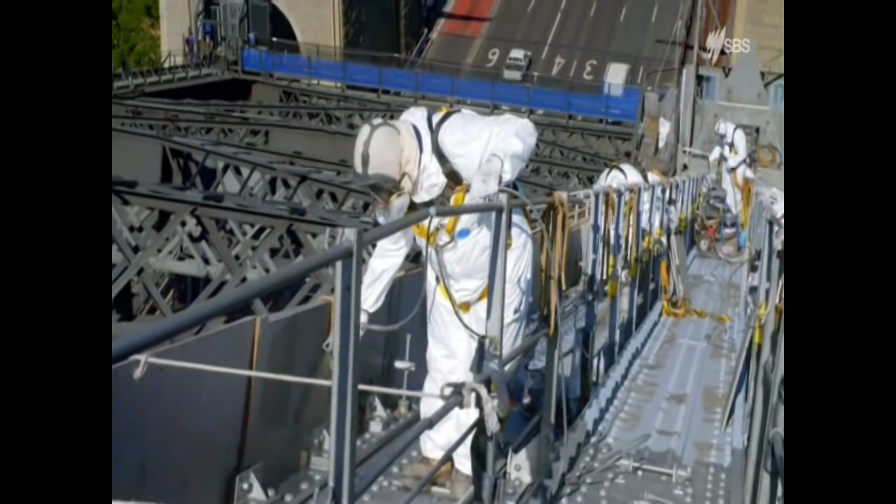Today, the population of Sydney is in excess of 5 million, and over 1 million vehicles cross the bridge every week. To cope with this relentlessly heavy use, a large team worked round the clock to ensure that the 485,000 square metres of steelwork remains properly maintained.

I just love getting in behind the skin of these giant structures. This is where you learn how the whole thing lives.

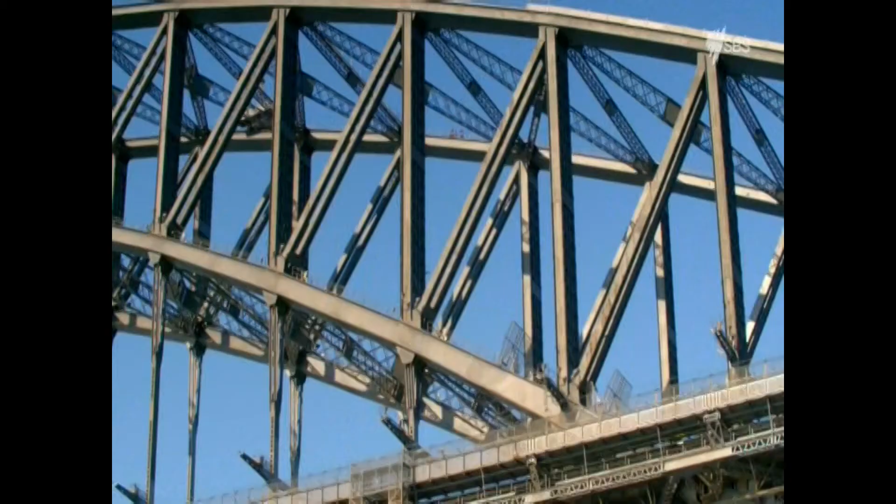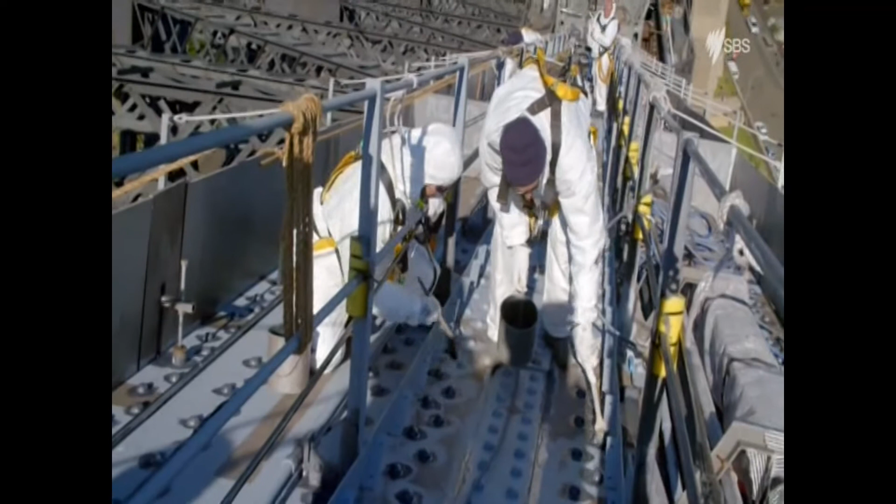Part of the maintenance programme includes repainting the exposed steel sections every 5 years. A team of specialist painters used 30,000 litres of bespoke Sydney Harbour Bridge grey paint just to complete one coat. There's, I think, 6 million rivets on this Sydney Harbour Bridge. We've got about 85, 90 maintenance workers, which includes painters, riggers, carpenters, boilermakers, and it's still not enough.

Back in the late 1920s, concerns over the bridge's future maintenance couldn't have been further from people's minds, as controversy over who actually designed the bridge was gaining momentum. John Bradfield, the chief engineer, had without doubt been the driving force in getting it built, and it was his proposal that the government had finally accepted.

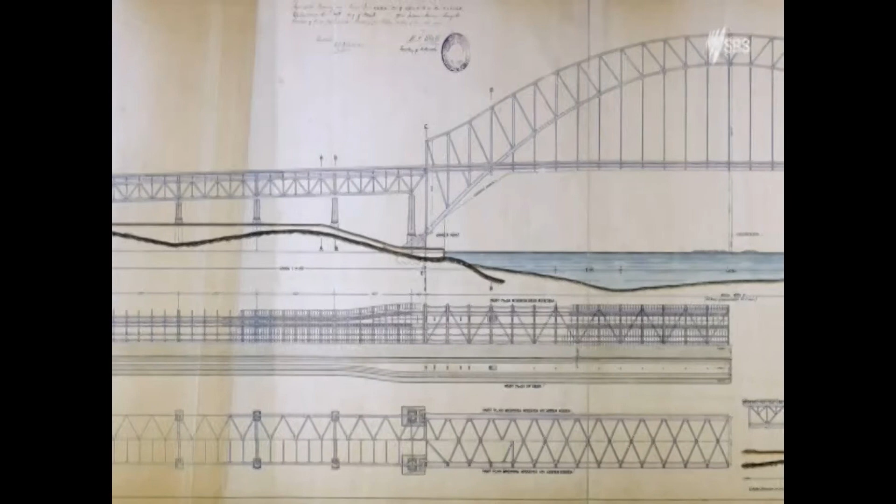Ralph Freeman, the consultant engineer for Dorman Long, felt he was entitled to at least equal credit. He'd produced all the detailed plans, calculations and drawings, as well as providing the solution for supporting the arch during its construction. But this had all been done under the close scrutiny of Bradfield.

Grandfather spent hundreds and hundreds of hours and a team of people checking every calculation that the contractors did and signing off on every calculation that was done for the bridge. The bridge wouldn't be built unless Grandfather had been there from day one, and he was. It was a 30-year project, and the bridge is where it is today, why it's there today, in the form it's there today, because of his overall supervision.

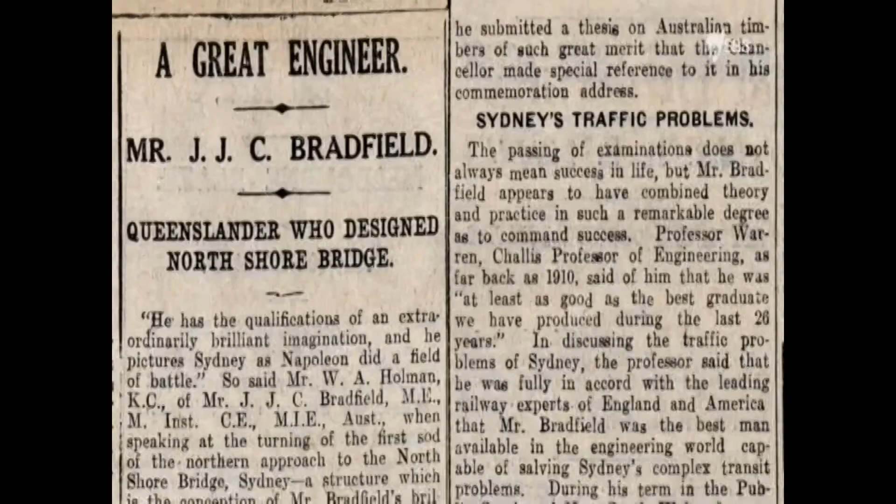Even during the final stages of construction, Bradfield was ever present. He appeared in all the official photographs and wrote articles for the public and engineering community. To the world, he was the designer of the Sydney Harbour Bridge.

Freeman wanted recognition of his own, so he wrote to Bradfield, pointing out that he'd been working on the design since 1921, and added, 'I ask you to use your influence as far as you can to prevent publication of the statement that the design of the bridge is yours.'

He went on further and demanded that I would personally like it to be known that the designs of the bridge submitted with Dorman Long's tender were prepared under my direction. A polite but strong request.

Bradfield was unsympathetic. He replied, 'We're producing between us the steelwork of a structure of worldwide significance, the details of which are prepared by you, but are subject to my revision before approval.' And he went on, 'Your request that I should proclaim that the design is yours would be incorrect if construed in any sense.' When Freeman sailed from England to Australia in 1929, he confronted Bradfield, who refused to back down.

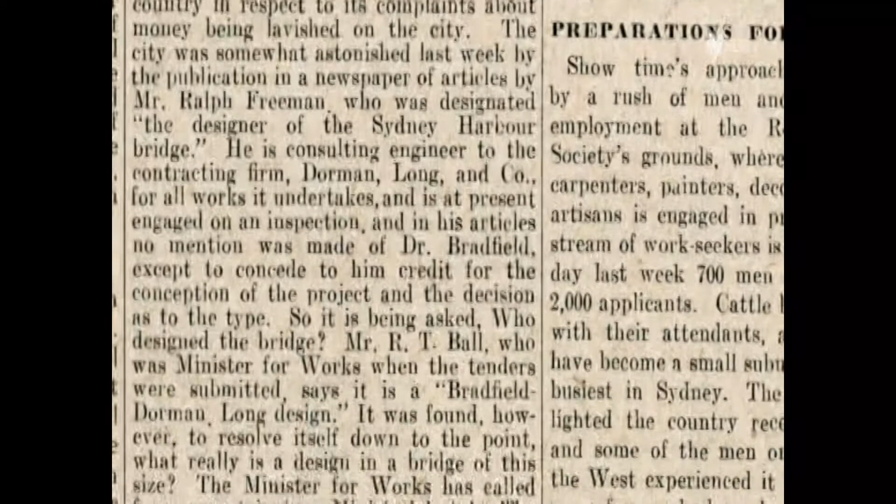An exasperated Freeman went to the papers. When the story broke in the Sydney Morning Herald, it was a scandal. Freeman's claims were astonishing. For years, Australians had celebrated Bradfield as the designer of their bridge. Now some unknown Englishman had come along trying to steal the glory, not just from a local hero, but from their country itself. Neither man would back down, both of them taking to the press to state their claims and attack each other. In fact, the argument became so heated, the Institution of Civil Engineers threatened them both with expulsion should the so-called newspaper controversies continue.

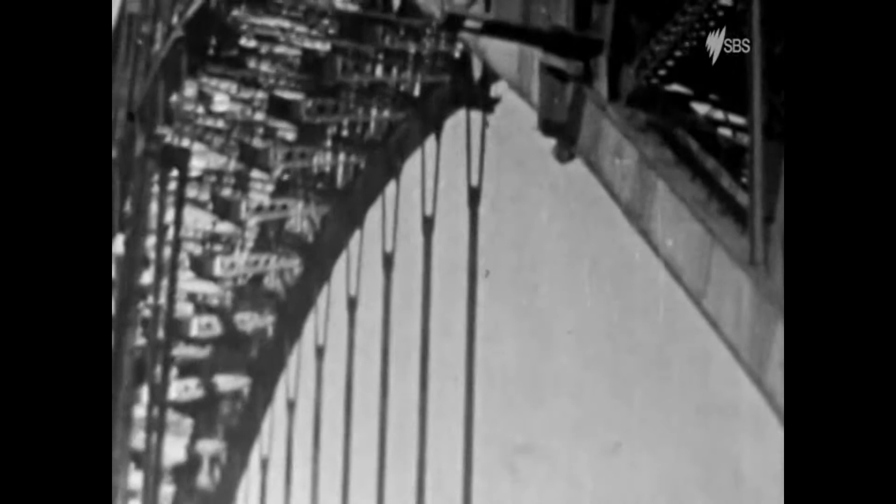As the argument raged, the workers on the ground got on with what really mattered, the actual building. When the arch was complete, the creeper cranes worked their way back down, constructing the roadway and other parts of the bridge from the centre out.

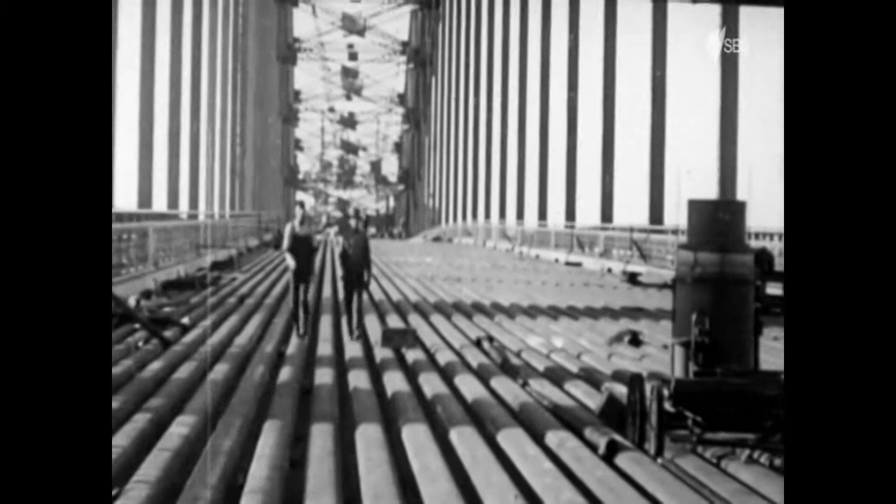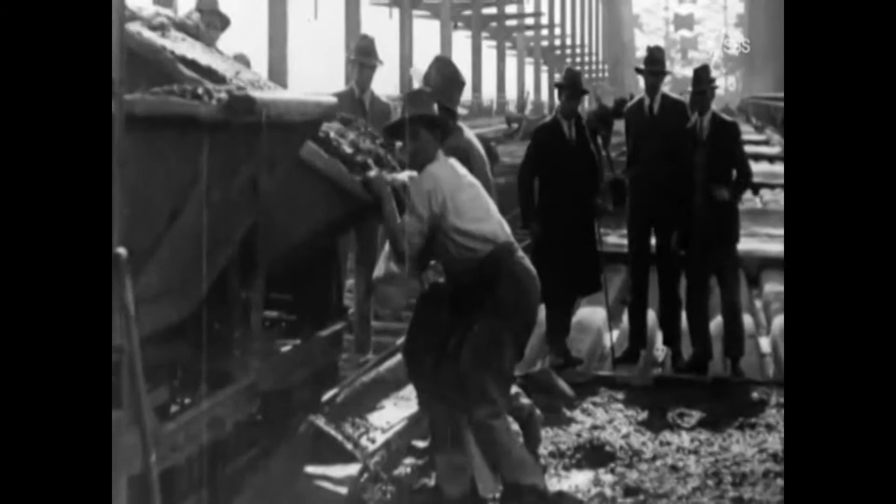Horizontal crossbeams were attached to vertical hangers which hung from the arch above. The deck for the roadway and railway, over 3,772 feet long, was built on top of the crossbeams, with the deck itself being completed by June 1931. Rails for trains and trams were laid, and the road was surfaced using concrete topped with asphalt. Power and telephone lines and water, gas and drainage pipes were also all added to the bridge in 1931.

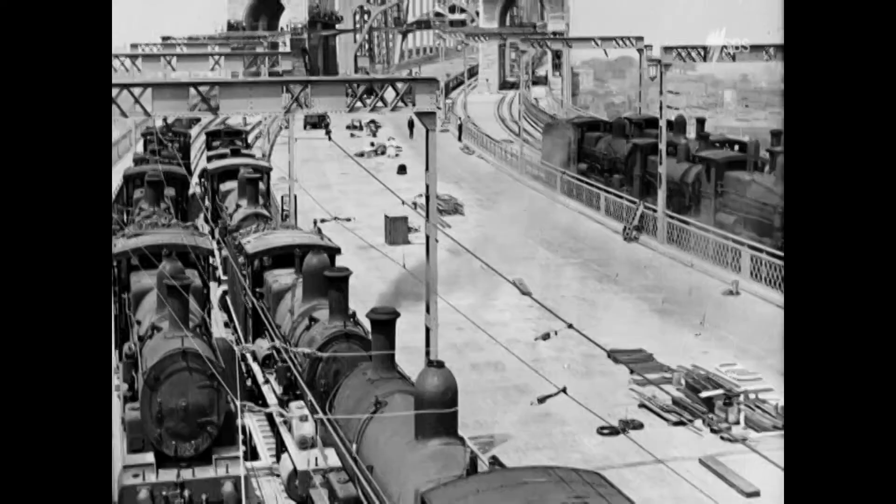And on the 19th of January 1932, construction came to an end. Three weeks of testing followed, including load testing using 96 steam engines positioned end to end. This bridge is so incredibly strong, even if every roadway, every railway and footpath was completely rammed, it would happily take it. It's been tested to withstand a 100-mile-an-hour hurricane and a temperature variation of 120 degrees.

In March 1932, it was finally ready for its grand opening. The dispute over who designed it rumbled on. In the end, a compromise was reached. As the plaque here says, the general design and specification were prepared and the whole supervised on behalf of the Government of New South Wales by JJC Bradfield.

Freeman's name's also included. Here, look, Ralph Freeman, as consulting and designing engineer for the contractors. The plaque gives future generations the chance to acknowledge the hard work of both men, a point not lost on Bradfield's grandson. I think the thing that's clear, and grandfather recognised this, was that not one person could build the bridge on his own. I mean, the bridge involved a huge amount of determination, ingenuity, engineering excellence, and not one person could provide all those things all the time.

I think that he has the most claim to say that the design was his, but Freeman's role can't be ignored.